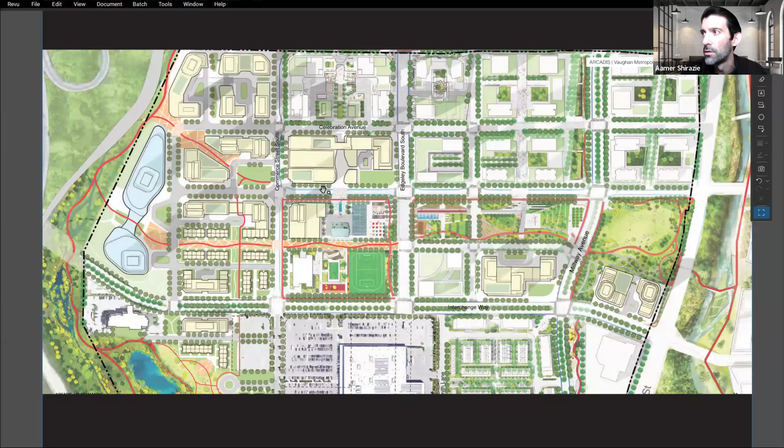We also do something called placemaking. What is placemaking? It's quite literally the making of places, and involves a few different professions that work with architects. There are master planners that master plan communities, landscape architects that work on non-building areas like green spaces, parks, and open spaces, and urban designers that help stitch architecture and landscape and a few other things together. All of that combined is placemaking. This is a quick snapshot of a master planned community where architects have worked on buildings, landscape architects have worked on park designs, and urban designers have had influence on the road network and other things.

So it's all about collaboration, cross-profession collaboration and communication, and the exchange of creativity. And I'll speak to more of that during the course of the presentation.

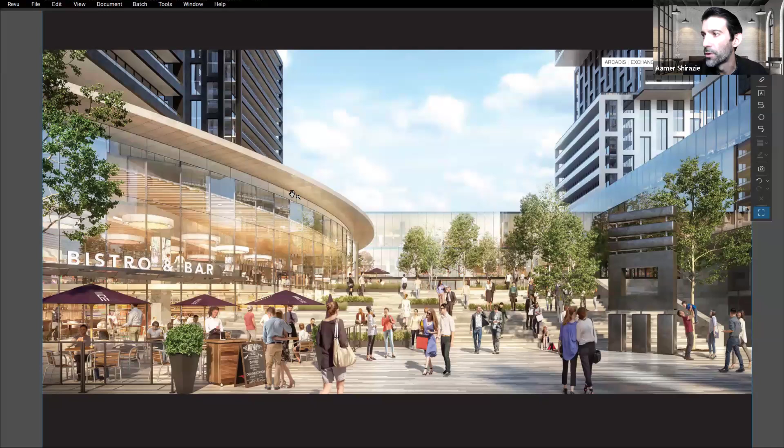These are just quick examples or images. This is a project under construction in Mississauga near Square One called Exchange District. This is an open space between buildings, so it's less about architecture and more about the open space design, where architecture is there in the background.

I'm one person, and any success I've had is down to the absolutely amazing and talented team that I have. I'm lucky enough to lead a team of over 20 different architects and designers from different parts of the world, all of whom bring their individual ideas and identity to the table. That's a real privilege for me to have access to and to collaborate with them.

On a daily basis, we're working on a combined probably 70 plus buildings at the moment all over the Greater Toronto area. I have done work in Ottawa, and I've done work in Calgary as well in the last decade.

Before I get into a bit of background on how I got into the profession, I just thought I'd share a design example of a project that I worked on many years ago in Calgary.

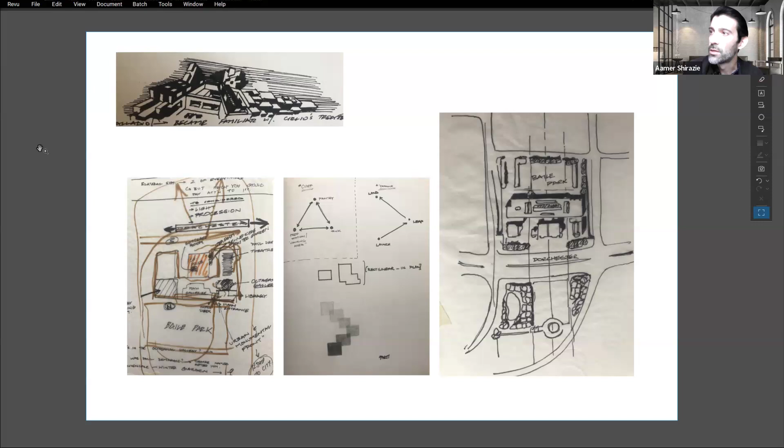As soon as I got back into architecture school, I got to pick up the pen again. I got to sketch again, see things in a different way, communicate and explore things graphically again after many years. That was like being born again. It was a really beautiful phase in my journey and in my profession.

And I got to explore shape and form. Sorry guys, the PDF's not liking my sketches.

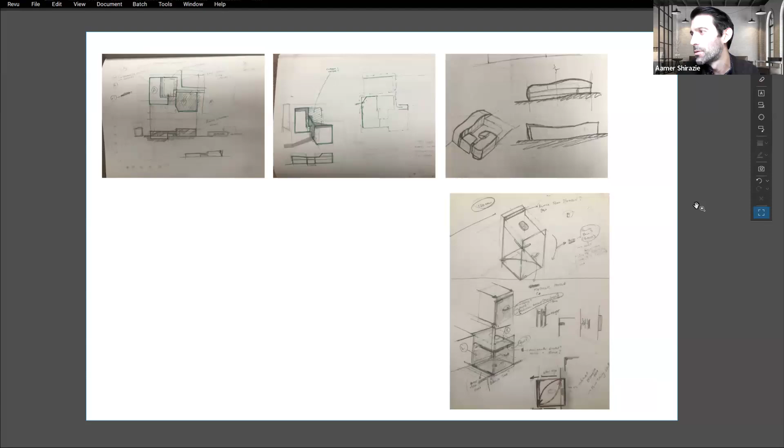Very laggy. Look, I'm going to go to the next slide, which was an early project where it's just going to load in a second. We took a simple object like a garlic press, and it's all about trying to understand how a simple object functions. That's the beginning of your journey, the beginning of your education. How do you graphically represent that? How do you pull the object apart, understand how it's assembled, and communicate that visually?

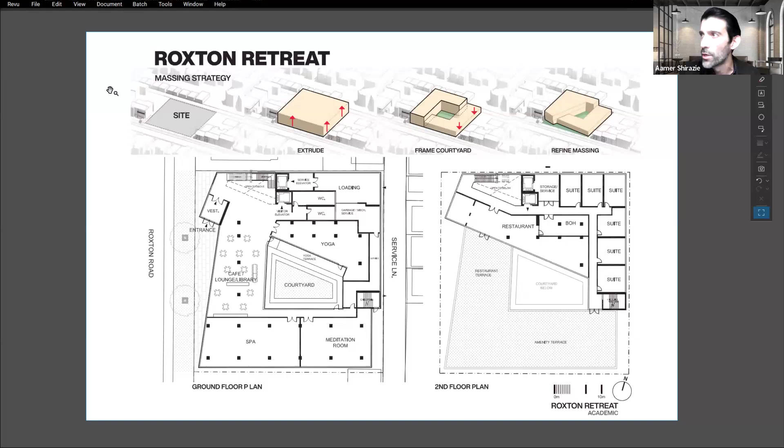And you grow from there. I'm just going to skip ahead. These were some projects coming out of school that I used to apply to graduate school, where once you get to that point in your education, you do need architectural projects. So this was just a community center, some 2D and some 3-dimensional images to communicate the design. I won't spend too long on these.

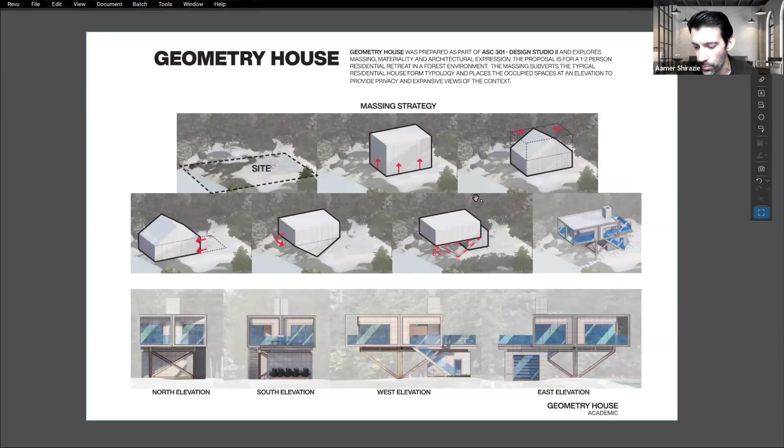An exploration of a cabin in the woods. It's a simple kind of typical house geometry that you would draw as a kid, and flipping that on its head, literally reversing it and developing a building that is that kind of house shape, but where the top of the house is actually used as structure to support it so that you have views above a lake.

Okay, and I'm going to skip ahead a little bit. We can come back to some of these as part of Q&A.

What I would really like to highlight is that all of the things that I did in my childhood, in my high school, but also through advertising in the restaurant, including networking, presentations, understanding business principles and accounting, I use all of that in architecture.

I now manage a mini studio within the company, and I have to worry about payroll. I have to worry about contracts and a lot of the things that I did as part of the restaurant.

So I want to pause here and look at some key takeaways from this first part of the presentation. Number one, don't be afraid to challenge your assumptions about yourself. I had several moments where I doubted myself, whether I'd made the right choices, and those were important milestones in my journey and career. With the support of close family, I decided to challenge myself and say, you know what, I think I can actually pursue a career in design. It's not too late.

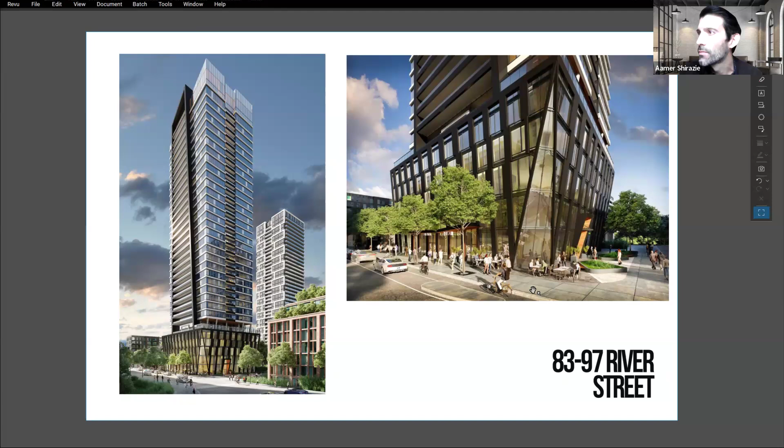Played a lot with angles and kind of sharp geometries over here. And I'm going to go quick.

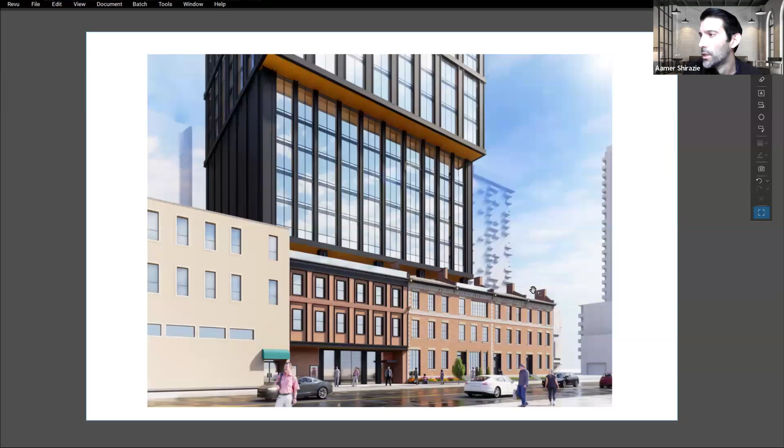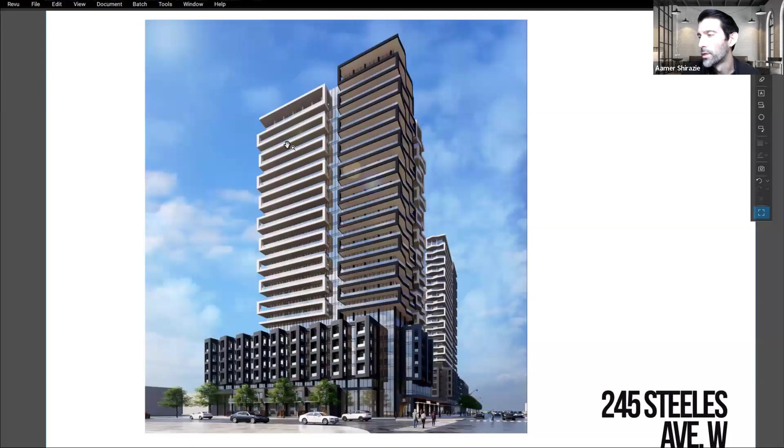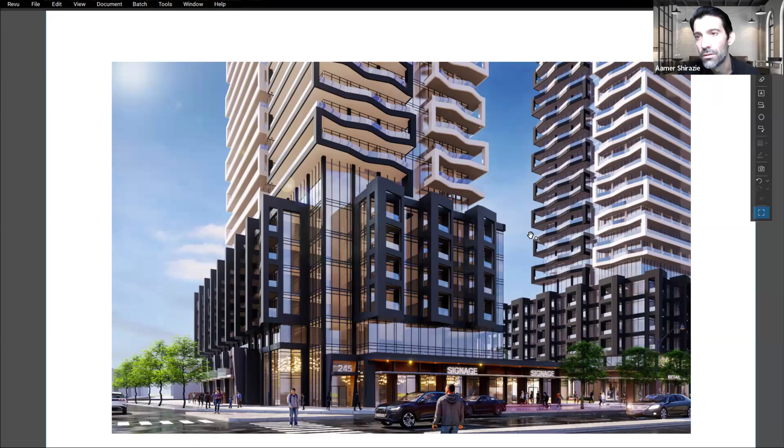And a couple other buildings. What you'll see in some of these buildings, this is probably a good example, is a likeness between a lot of the sketches that explored black and white ink forms and what we've ended up with. So a lot of my early interests in sketching and design aesthetic has not been lost, but it's played a major impact on the way I design buildings now. Again, lots of play of pattern and strong visuals.

I'm going to fast track through these. There's about 20 other buildings I would have loved to have shared, but I know we're tight on time, so I'm just going to fast forward to my closing notes.

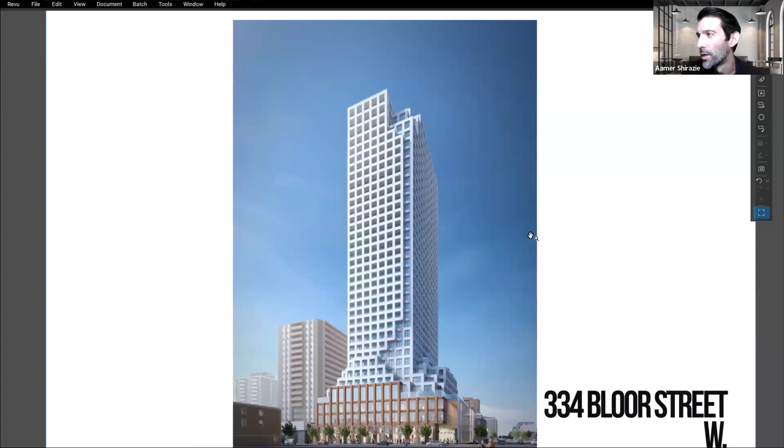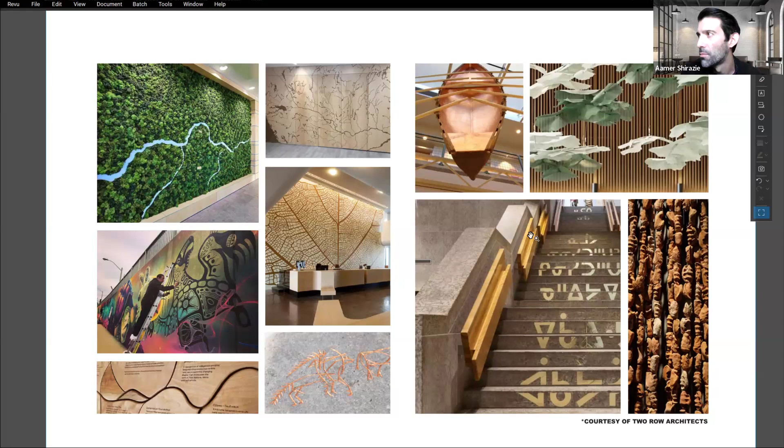This is one that is actually a very cool project at Bloor Spadina, across from UTS in Toronto. There's a really large glass atrium, and we're working with a local Indigenous architect on ways to bring indigeneity to that atrium, so it'll not only pay homage to the history of that site, but also provide some meaningful art.

And again, I want to just thank my immensely talented team for the work that you just saw. None of it was done in isolation.

And to conclude, again, make your experiences count. Don't be afraid to challenge assumptions about yourself. Find a great mentor. And please, at some point, if you find yourself, and you will, at a point in your life where you have any experience that you can offer others that can help make their pathway a little bit easier, please do so.

But I see the sense of wonder and the joy he gets from creating when he sketches, when he plays with blocks. And I think we lose that as we grow up. The beauty of any kind of design-based profession is that you get to hang on to a bit of that playfulness and creativity and that sense of wonder. So I owe a lot of that to my son, and I'm grateful that I get to renew my perspective every day playing with him.